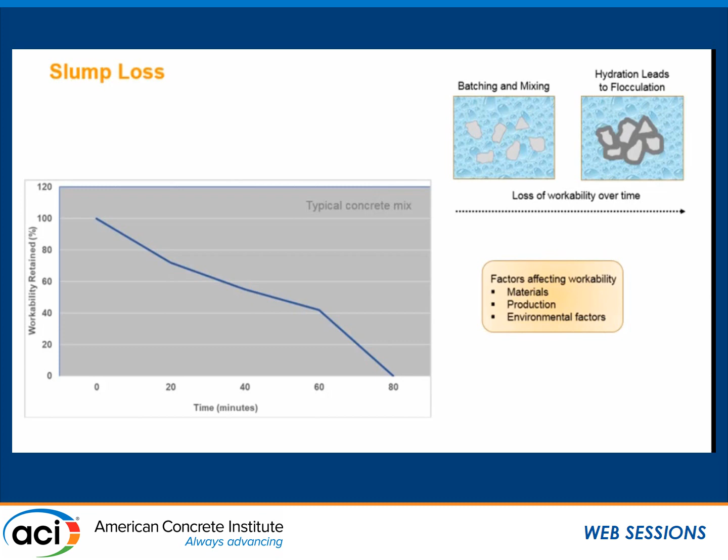So the slope of that line would change as your materials change. Are you using a real rapid setting cement or a little slower setting cement, a little slower reactivity cement? What is the production time and the transit time through the job site? And the environmental factors - what is the temperature of the concrete itself, what is the ambient temperature? All those things will change that slump loss.

So let's rethink this 90 minutes here for a second. I think what Terry showed earlier was, in his opinion, it was an unnecessary limit. And some of the reasons were already shared with this group, but it's like, what is a producer to do if they have a project that's specified that's a very long distance away from where that concrete's being batched?

What is a producer to do if traffic or weather conditions really slow up the batching to the actual delivery and placement of that concrete? And what about the application?

This is just one of maybe several applications, but drilled shafts, for an example. You're batching the concrete, and then you're mixing the concrete to make sure it's good and homogeneous, and then there's some transit time. And then when you get to the job site, there's positioning that truck to the pump. And let's say, for example, we're using self-consolidating concrete for a drill shaft - it's a very fluid mix, but maybe the discharge is a little slower to make sure everything gets consolidated. And then there's multiple trucks positioning themselves because we don't want to get any cold joints in there.

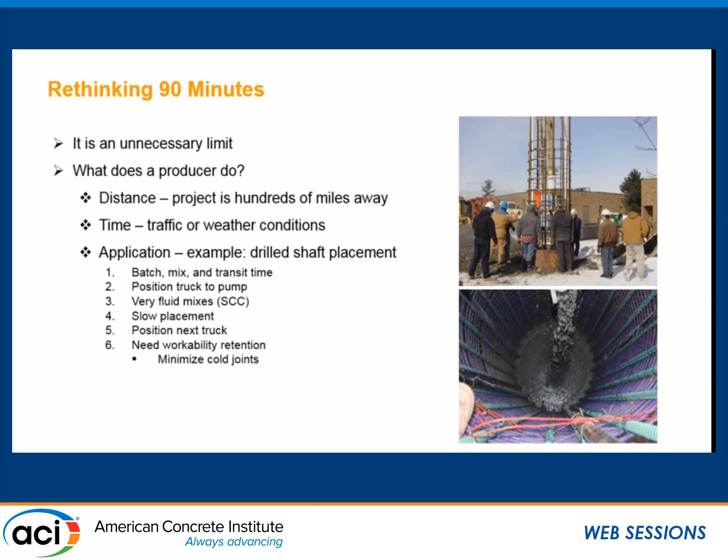So you could easily exceed 90 minutes in some applications. This is just one example. So what does the industry do? What do we do as an industry to counteract slump loss? Well, we can retemper with water.

That's late addition of water. We can batch higher than required slump, and that one's a little bit scary, but I'll show you a little graph on that. We can use chemical technology in the form of a retarding admixture, a high-range water reducer and redose with that, or an extended set control, also known as hydration controlling admixtures, or a workability retaining admixture. So we have lots of options we've dealt with over the years to counteract slump loss.

On the admixture side, a retarding admixture is nothing more than an admixture that decreases the rate of hydration, and as a result, it can lengthen setting time.

An extended set controlling admixture is a little bit different. It functions by literally stopping or significantly retarding the hydration of Portland cement, and it also thereby lengthens the setting time.

And a workability retaining admixture will provide workability or slump retention when used in combination with normal, mid-range, or high-range water reducers without affecting the set time. So there's a distinction between extended set control and workability control - one will affect set time, the other one will not.

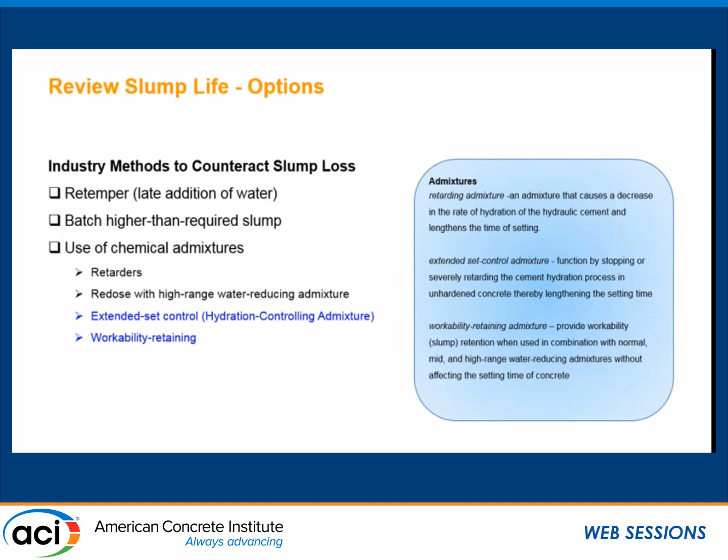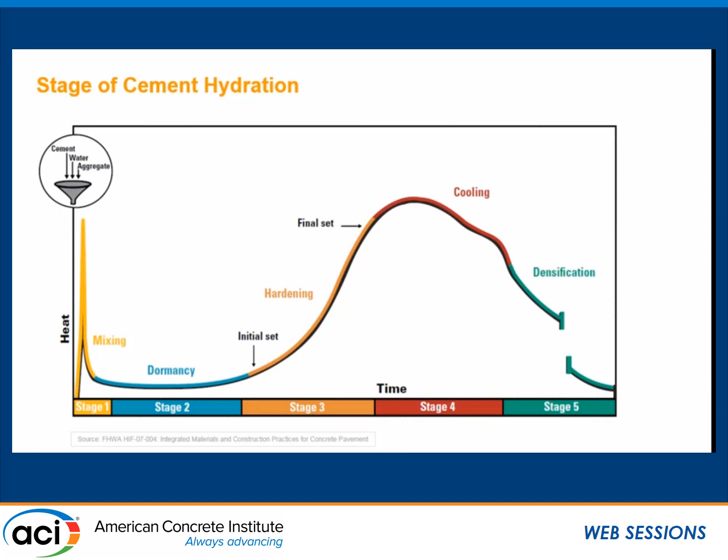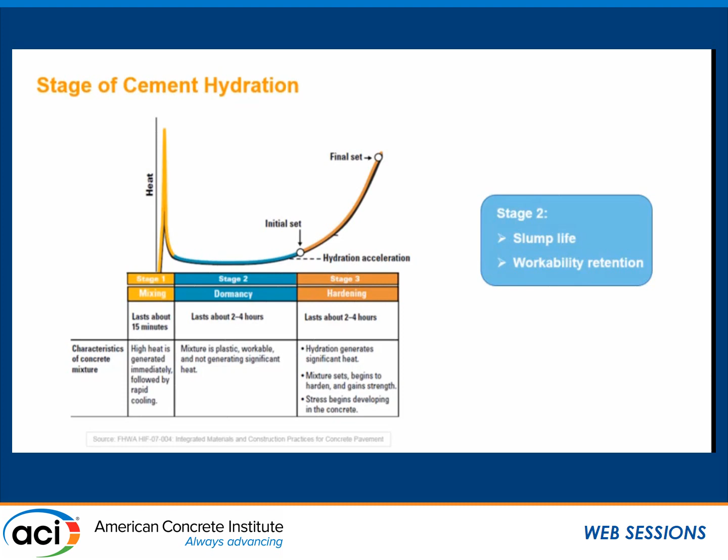But I think it's interesting that we look at this, because stage 2, for example, on average typically lasts about 2 to 4 hours depending on your mixes and conditions. But that's where you find your slump life and your workability retention in that dormant period. So that becomes a focus.

So let's look at a retarding admixture for a minute. Those slow the hydration of cement in concrete, and that rate of slump loss may be decreased, and the working time can be extended. That's found in the ACI 212 document on retarding admixtures for concrete. They meet ASTM C494 types - type B is a retarding admixture, type D is water reducing and retarding, and type G is water reducing, higher range, and retarding.

I don't think we see in our industry many of the type Gs anymore - they've pretty much been phased out. But these are typically used when it's warm outside, and you're going to get more slump loss when it's warm, so these are designed to retard the hydration of Portland cement when it's warm.

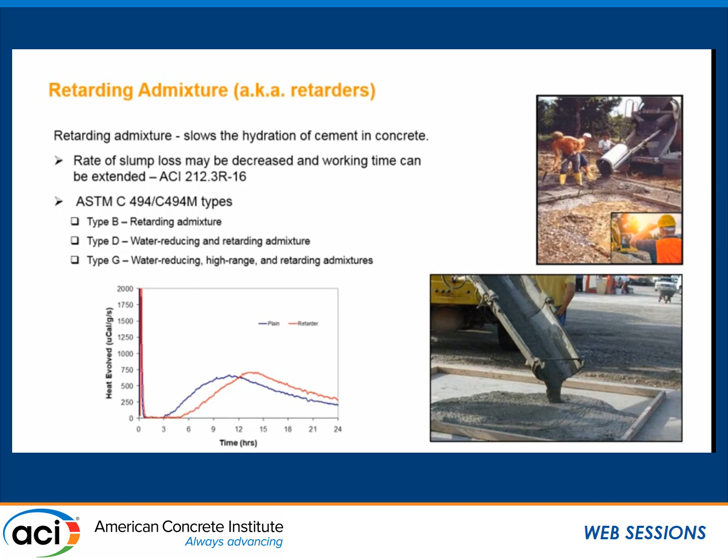And you can see in this graph - this is a heat evolution graph - the plain concrete that's untreated, no chemical technology in there, has this little dormant period from 2 to 3 hours, shown in blue. When you put a retarding admixture in there, it simply shifts that heat curve to the right, making that dormant period much longer - nothing's happening, slump life. So retarders are used fairly regularly in our industry for some slump life.

Because it's a water reducer, you can have a water reducer that retards as well at elevated dosages, but this was just for the retarding admixtures.

Yeah, good question. The hydration controlling technology is a little bit different. This is an industry innovation that came on the market in 1987, so we're talking 31 years ago already. It effectively puts concrete to sleep - it stops hydration, and it works both on the silicate and aluminate phases, which is a little different than retarding admixtures. It forms a protective barrier around the cement, and over time that effect dissipates, and when that dissipates, the barrier breaks down and then concrete starts to hydrate as normal again.

So just graphically, if you see the little cement grain here, when you put one of these chemical admixtures in the concrete, it forms a physical barrier around the cement grain, so water's not getting to it - you're not getting hydration.

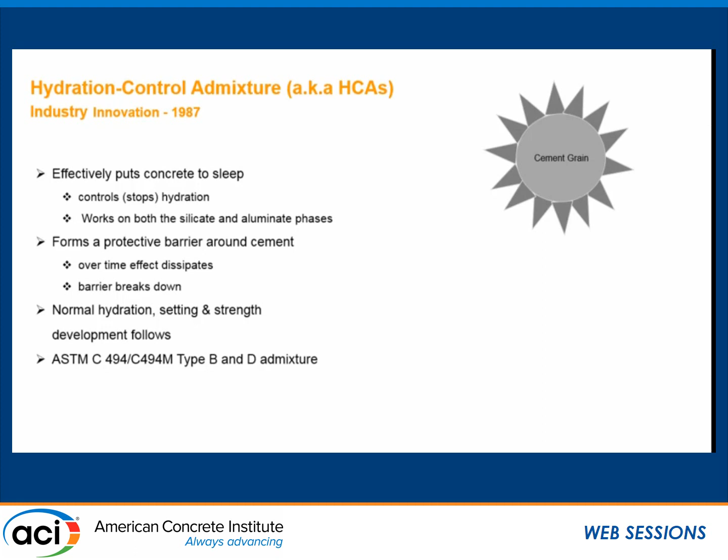Over time, that barrier will dissipate. When that happens, normal reactions start occurring as the cement grains are exposed to water again and the cement begins to hydrate. That normal hydration, setting, and strength gain will occur after the barrier breaks down. The more chemical you put in, the more robust the barrier, and the longer you can keep that concrete fluid or plastic. It meets the criteria for ASTM C494 for a type B and type D admixture.

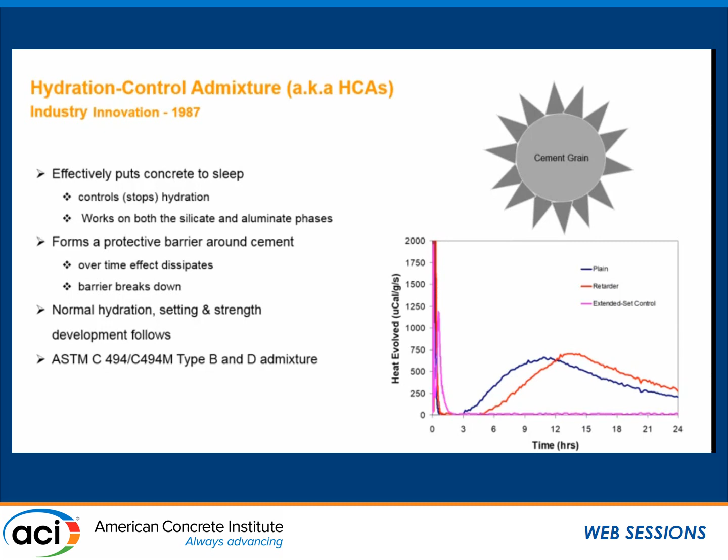Here's the same heat curve, except the extended set controlling admixture was added, shown here in pink, to show you it can put concrete to sleep with no hydration for as long as you want. In the real world, you can delay this as long as you want, but it becomes economically unreasonable if you want to keep it asleep for a day, two days, three days. It can be done, but there's no reason to. This is designed to show you the difference in heat generated because nothing is happening.

Now, one of the more recent innovations, from 2006 I believe - yeah, it was 2006 - is the workability retaining admixture.

These are added at the batch plant, and the effectiveness is based on the dosage. It maintains concrete slump and workability over time. Here's an example: if you take an 8.25 inch slump concrete with 3 fluid ounces of water reducer, it'll lose, over 90 minutes under ambient conditions, down to about 4.5 inches of slump. Take the exact same mix and conditions, add 4.5 ounces of a workability retainer, and you start at an 8.25 inch slump and end up with an 8 inch slump 90 minutes later.

The difference here is there's no effect on early strength or set time. It's a much different technology to keep slump alive and workability good without affecting your strength or early set time. So it does not retard, does not affect early strength, and will meet the ASTM C494 criteria for a type S admixture.

Here's an example of data showing the differences between hydration control and workability control technologies. With a setting time of a little over 6 hours for a reference mix, you can keep workability by adding a hydration stabilizer, but you're going to affect your set time - it'll go up a bit. So you can maintain slump, but set time will be affected. When you add the workability retainer, shown in green, you can extend slump life without affecting early set time. So there's the distinction, there's the difference.

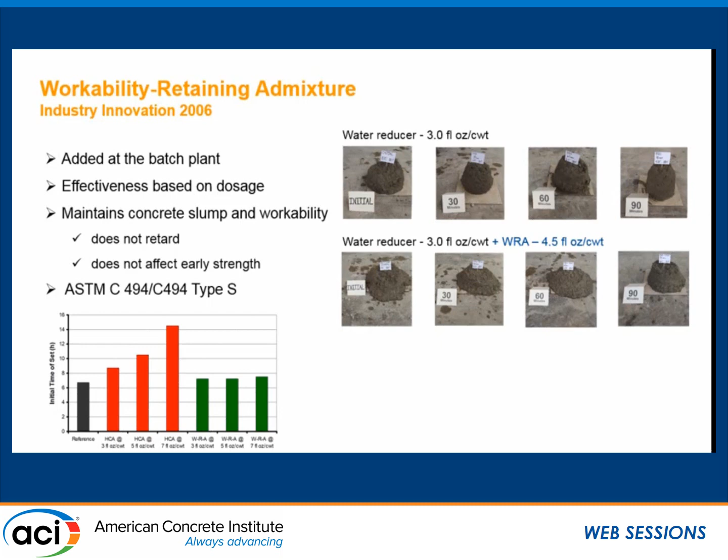Both of them have their uses in practical applications, which we're going to talk about now, after we look at some of the effects these have on concrete properties.

Let's look at this graphically for a minute - this is just designed to give an illustration of what happens. Actually, slump loss is not linear like this; there's a little bit of curvature to it. This is just for illustrative purposes. If you do nothing to the concrete, you're going to lose slump over time, regardless of what your initial target was.

You can add water - after you lose so much slump and want it back, you add water, retemper the concrete, you'll get some slump back, and then it's going to lose slump over time again. You can do a similar exercise with on-site additions of super plasticizers, where you lose some slump, add some super P on the job, get your slump back, and then it loses slump over time again.

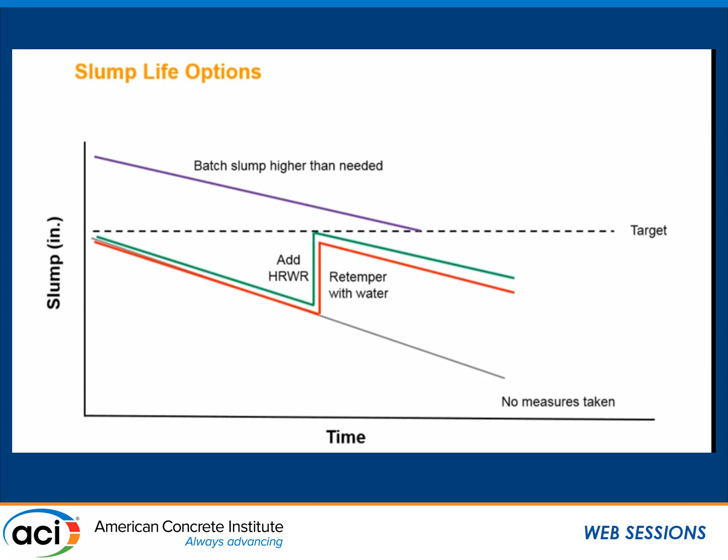Or this is kind of the scary one, but I know it's done and people do it sometimes successfully: batching way more than you need and hoping you get to the slump you want at the job site. That one's a guessing game. It's done successfully sometimes, and people really know their materials and delivery, but that one's a little bit sketchy, in my estimation. Those were the three approaches we dealt with for quite some time.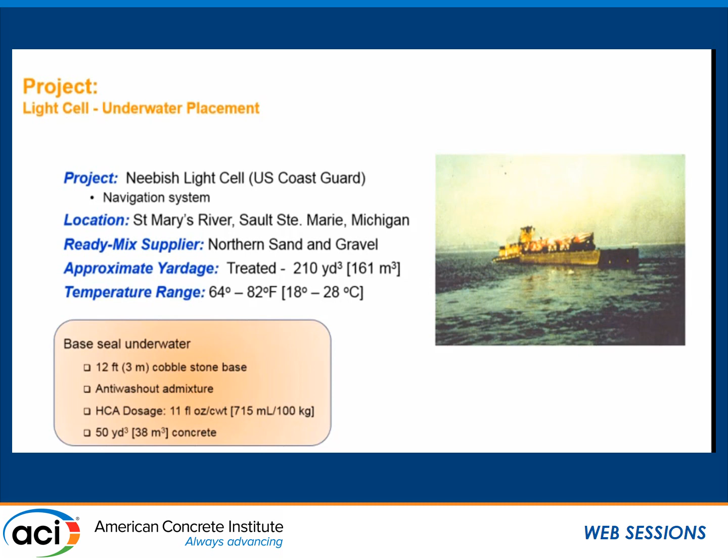Hydration controlling admixture at 11 fluid ounces, 50 yards of concrete. The transit from the batch plant to the barge, loaded on the barge to the site, we're talking one way, 12 hours. You have to do some manipulations to the mix design, use some chemistry to get 12 hours of very good slump.

When you do underwater concrete, it's typically pumped or tremie placement. It has to be high fluidity because there's no vibrators underwater to consolidate the concrete, so it has to be pretty high fluidity. With this particular job, great flowing characteristics - design strength was 5,000 PSI, and we're getting 6,800 plus PSI on this job at 28 days. So underwater concrete is where you could use these types of technologies.

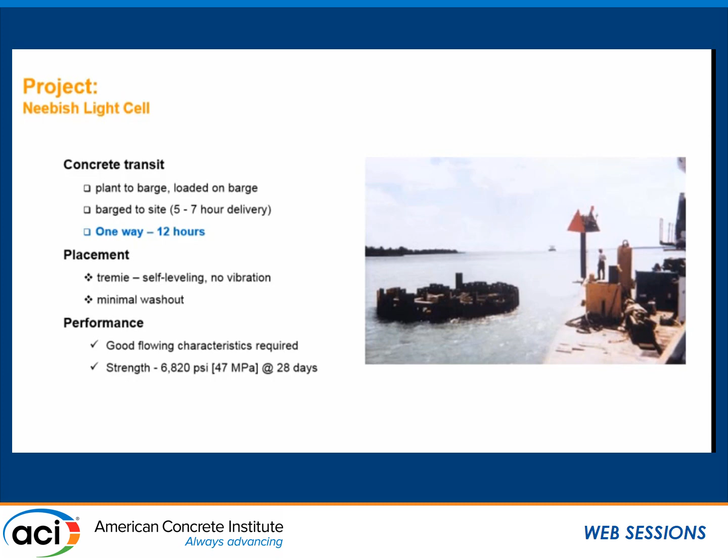It was mentioned earlier, One World Trade Center, New York City, Manhattan. The engineer says, I would like 14,000 PSI at 56 days, and it has to be over-designed 1,900 PSI for safety, and I want the modulus of elasticity to be 7.25 million on the modulus. Heat of hydration cannot exceed 160 degrees Fahrenheit, and I don't want it air entrained because we're looking for high early strength for the building.

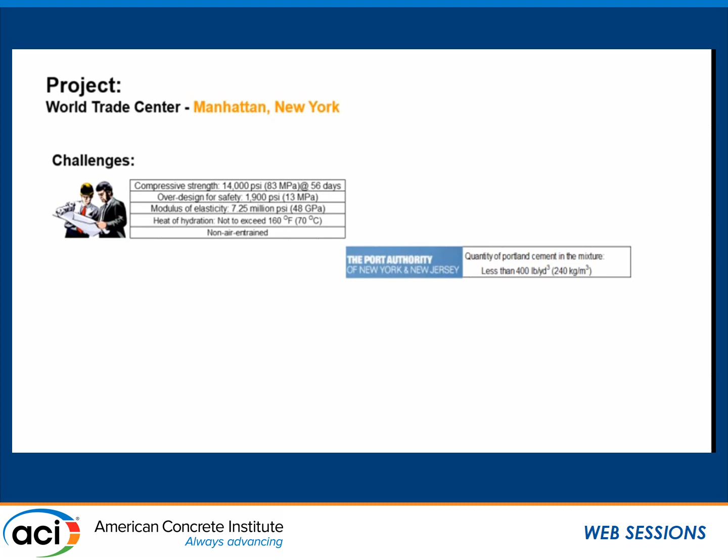But the Port Authority says, okay, that's fine, but we want it to be sustainable - you can't use more than 400 pounds of Portland cement in your concrete mix. And then now we have to look at the contractor. The contractor's got their own set of criteria - they say, yeah, but I want the slump flow to be 24 to 28 inches, and I want to pump it 100 stories straight up, and I want no loss of workability, and it's got to look good at the end. So there's all your criteria.

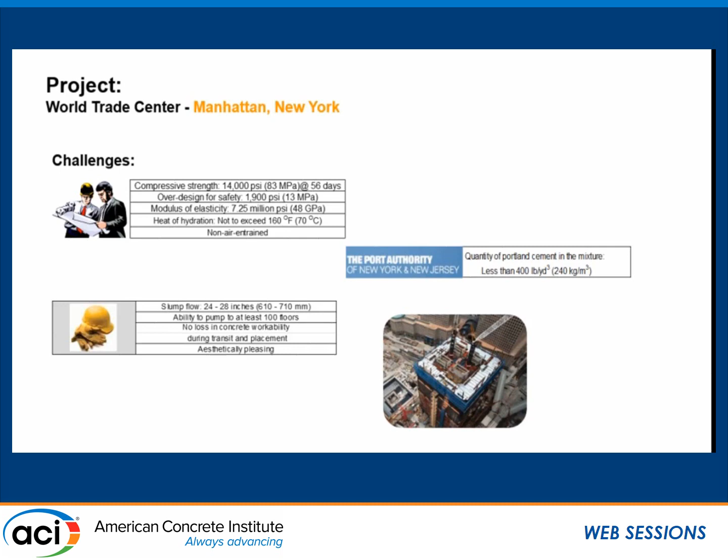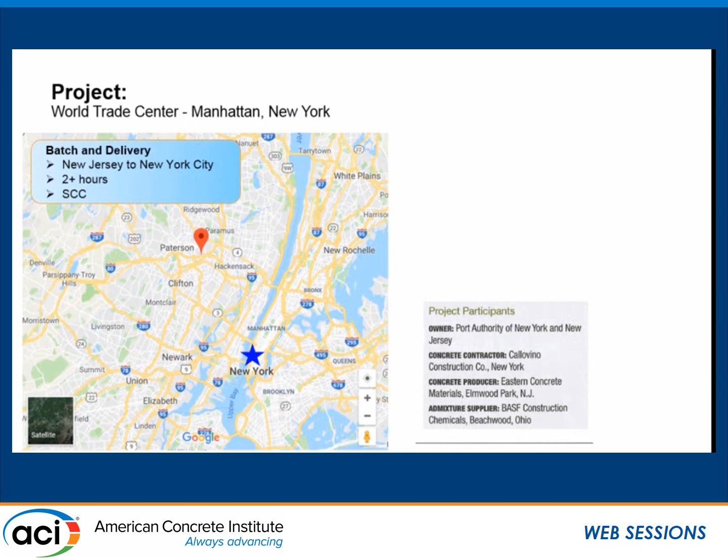So what do we do? By the way, it's batched in New Jersey and driven to New York, so we're batching it a state away - summertime and wintertime, through Manhattan traffic. So very routinely, more than 2 hours of haul time here, self-consolidating concrete, and it was able to be accomplished very nicely. Here was the interesting part about this project.

It was a combination of the workability retaining admixture and the hydration control admixture. We're pulling levers here based on what the engineer and the contractor and the owner wanted. Somebody asked before, if I'm an engineer, how do I specify all this stuff? It's a great question. We're finding you specify what you need and want for the project, and the material scientists from some of the admixture companies and the really good producers that we have for these kinds of projects will figure all that out. Tell us what kind of engineering performance you want and the parameters, and we'll have a discussion, we'll do mock-ups, and we'll make sure it works.

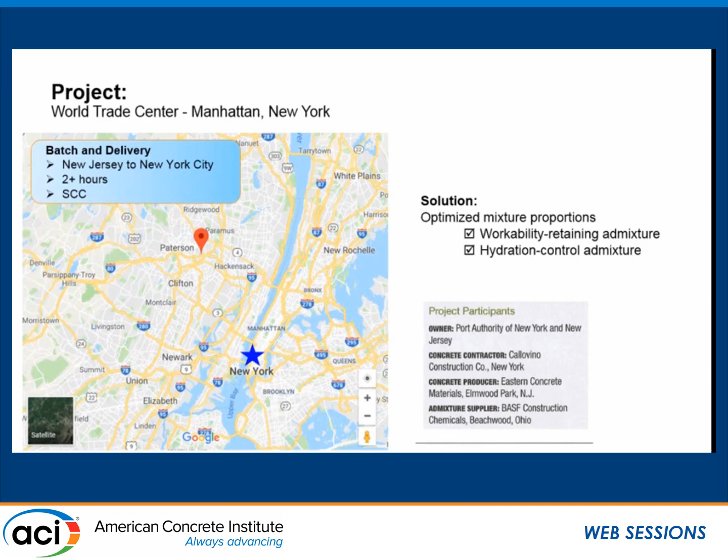In this case, it worked great - it actually won Green Site Project of the Year. All the performance requirements were met in terms of the strength and the modulus, and all the environmental factors and the environmental footprint was what won the Green Site Project of the Year. So we were able to reduce energy, reduce CO2, save on ozone depletion, water emissions, solid waste, land use - all that was quantifiable savings by using these kinds of optimized mixtures with these chemical technologies.

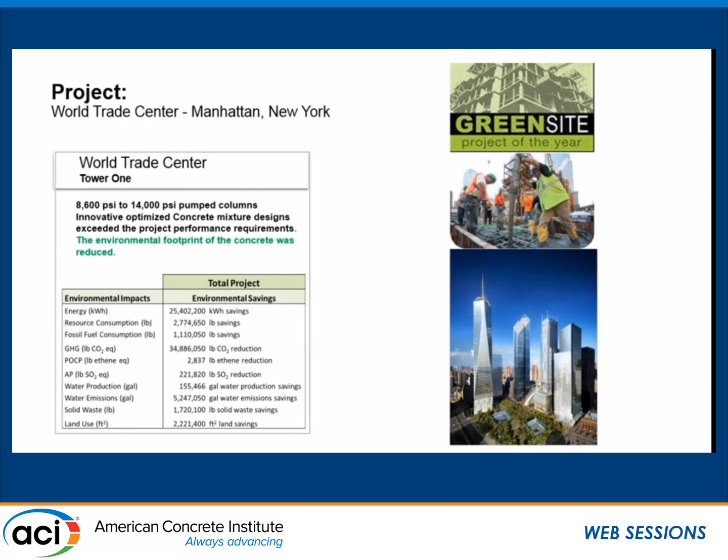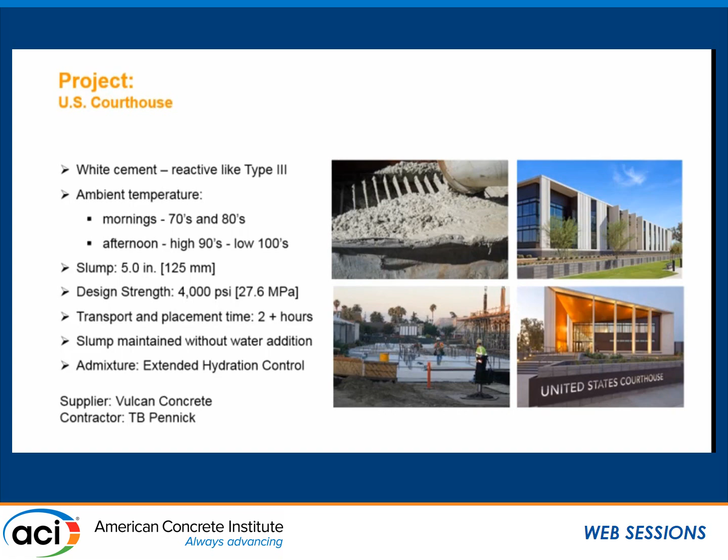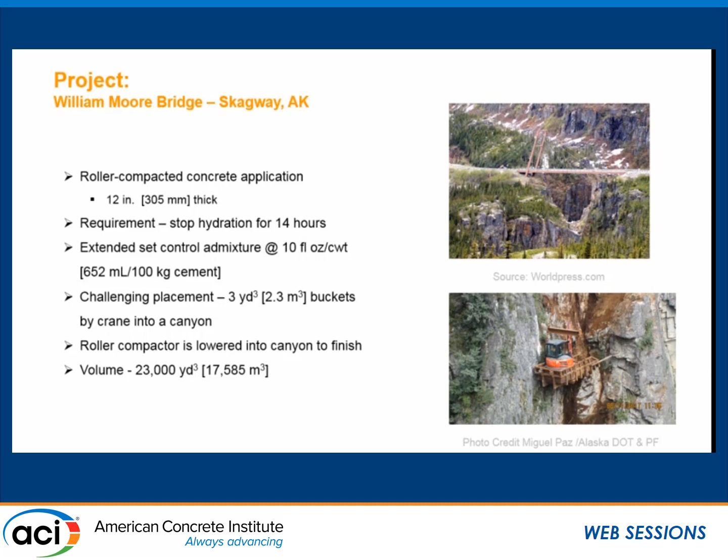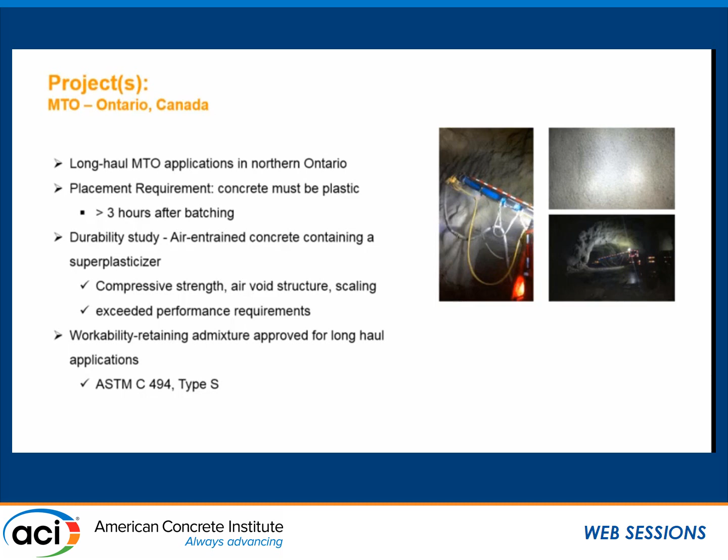This is a picture of it being used in a mine and some tunnels in northern Ontario. It's also used on bridge decks and other applications. And I had a video and it kind of disappeared, or maybe we can go back to it.

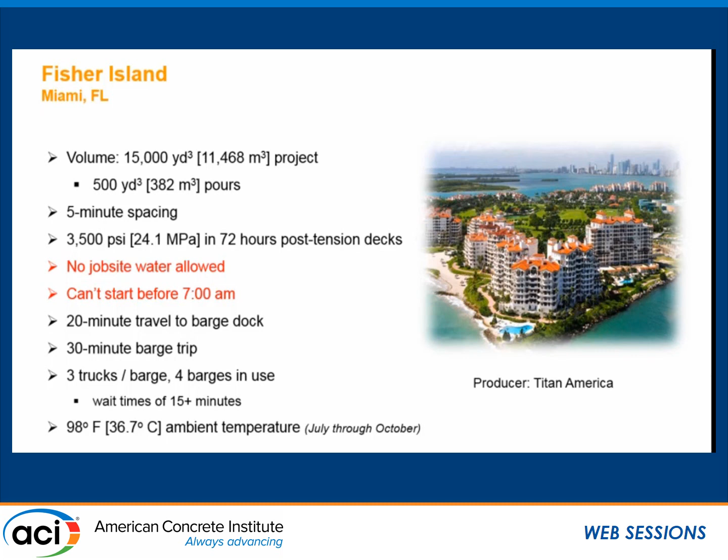20-minute travels to barges, 30-minute barge trips, 3 trucks on a barge, wait times, 98-degree ambient temperatures, and I believe some of the initial work that was done was without any measures taken for some of the slump loss.

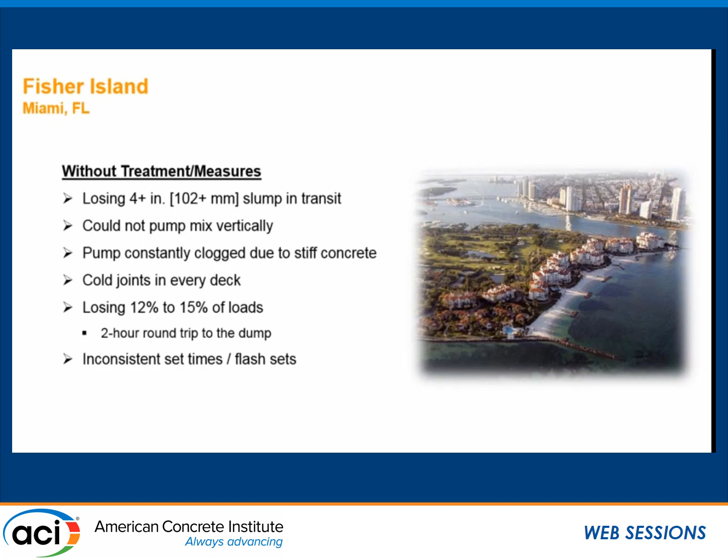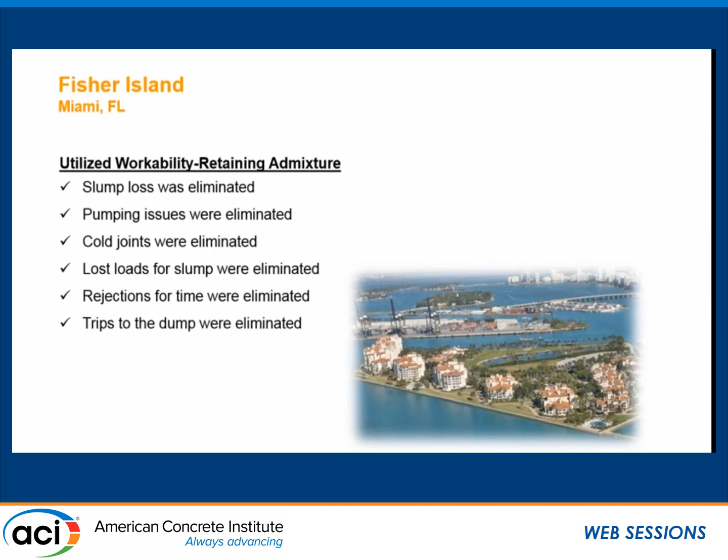So the answer was workability retaining admixture. All the slump losses were eliminated, pumping issues eliminated, cold joints eliminated, lost loads and rejections and trips to the dump. So these technologies can be used to give concrete good slump life and really good engineering properties. We have really good producers out there like Titan and others that can do these things. It shouldn't scare anybody anymore.

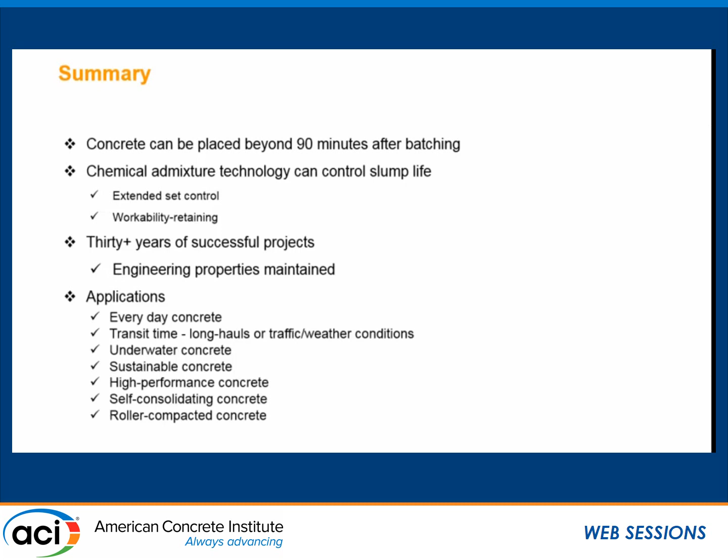So in summary, concrete can be placed well beyond 90 minutes. We've been doing it chemically for more than 30 years. The technology that can control slump life are the set control admixtures, extended set control admixtures, and workability retainers. We can maintain the engineering properties, and virtually every application you can think of, these are viable candidates. We've done it in everyday concrete, long hauls, traffic, weather conditions, underwater, sustainable concrete, fast settings, cement concrete, high performance concrete, SCC, roller compacted concrete.

The concrete itself doesn't know where it is or what it's doing. It's Portland cement, water, and aggregates, and some admixtures. If it's proportioned right with the right levers of tweaking some of the chemicals in there, we can do things before 90 minutes or well after 90 minutes and maintain the properties.